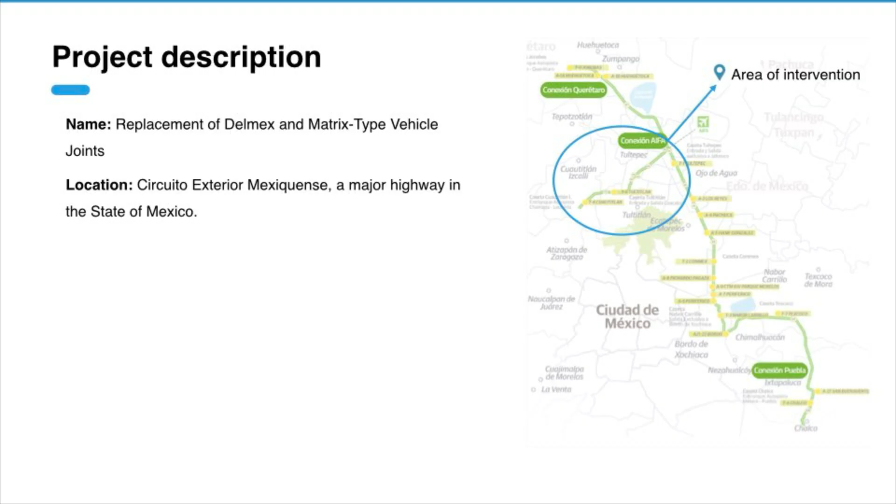The scope consists of repair works for Delmex metallic joints and Matrix asphaltic joints, covering 237.64 meters and 301.65 meters respectively. Given the high traffic volumes, it was critical to develop a comprehensive traffic management plan, which included installation of impact attenuators, compliance with road signage and safety regulations, and precise coordination of material deliveries and execution to meet contractual deadlines.

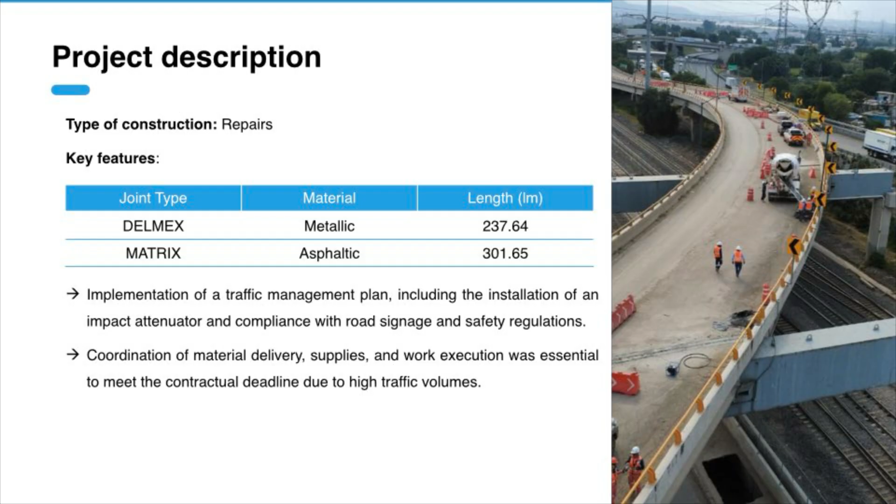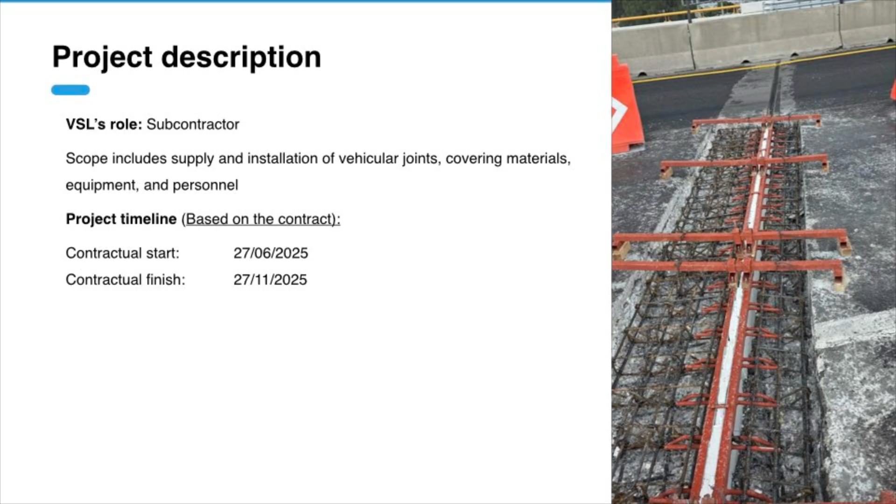VSL served as a subcontractor responsible for the supply and installation of the joints, including equipment and skilled personnel. The contractual period spanned from June 27 to November 27, 2025.

Our key deliverables were installing 500 linear meters of joint within the planned timeframe, overcoming initial delays due to administrative and equipment personnel approval processes, and adjusting to a shorter execution period from 5 months down to 4, strategically addressing mobilization, heavy traffic, and demolition challenges.

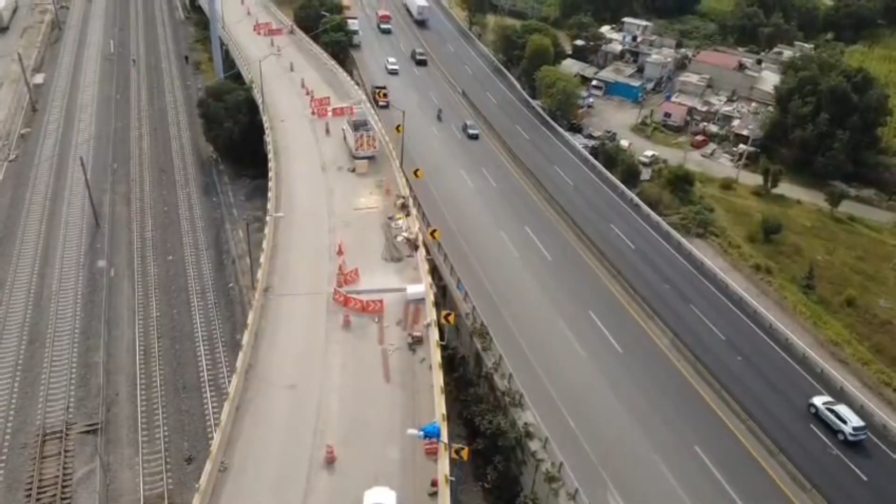The Be More approach focused on project recovery and time management, executing the works within just 4 months through strategic resource allocation and efficient workflows, worksite optimization, selecting the most efficient demolition and energy supply equipment, prioritizing both productivity and environmental impact, and financial recovery, improving the initial project margin from minus 10.32% to minus 5% through better cost control.

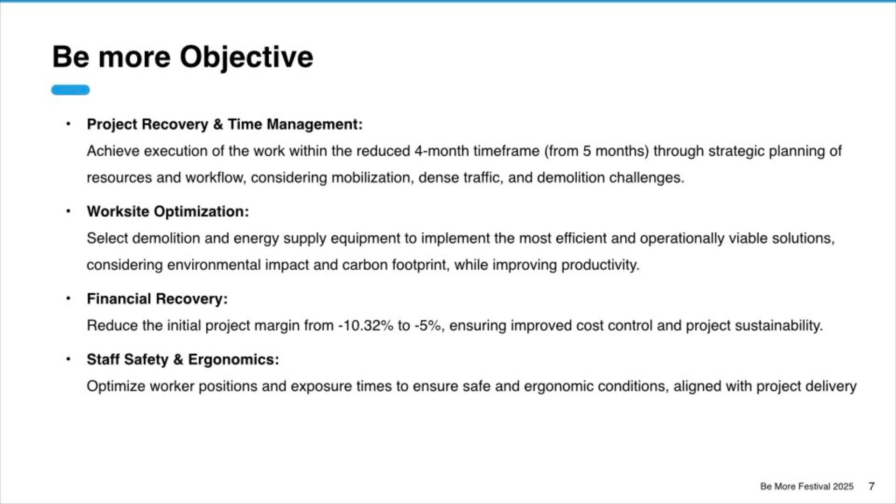Staff safety and ergonomics: optimizing worker conditions and reducing exposure times to ensure safety and ergonomics align with project delivery.

Number 2. Current progress.

As of October 20, 2025, we have reached 38% physical progress. Over 200 meters of Delmex joint have been installed, and we have just started working on matrix-type joints.

Delmex joint: it is a metallic component featuring a central opening onto which a neoprene insert is mounted to accommodate movement between fixed points, providing adequate clearance for thermal contraction and expansion. The assembly is anchored and secured with lateral bolts, supplemented by reinforcing steel, and subsequently encased in concrete in accordance with design specifications.

Matrix joint: it is a bituminous conglomerate that provides a hermetic seal and flexibility for expansion joints. Watertight sealing protects the bridge from water infiltration and contaminants. Flexibility allows for annual movement of up to 25 millimeters without cracking. Durability: resistant to traffic loads and adverse weather conditions.

Quick installation: heated and applied directly without the need for compaction or special tools.

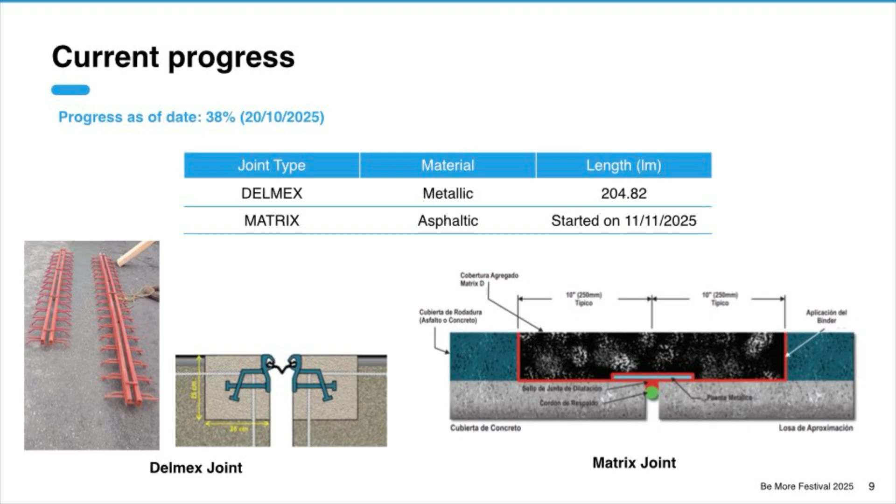Our schedule covers several sections and joint types, and we adapt as we face unforeseen challenges. Although the actual start date was August 28, our goal remained to finish by November 27, thanks to the reorganization of resources and work teams.

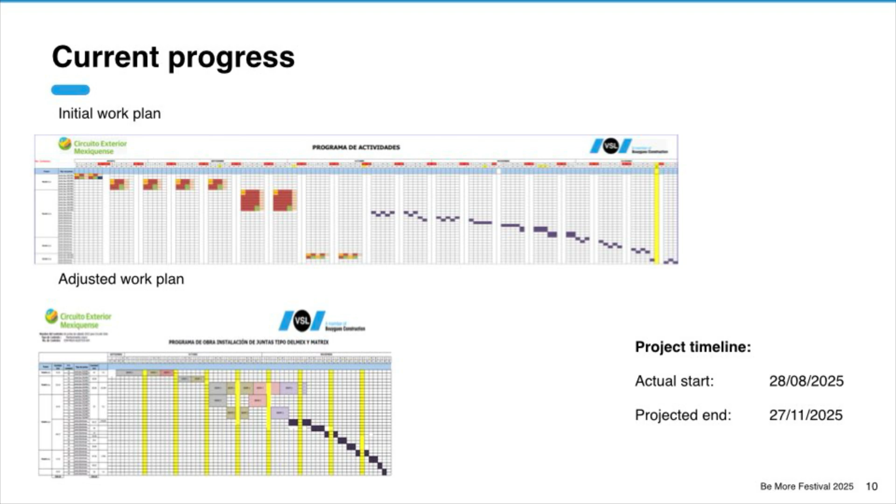Number 3. Lean implementation.

Throughout execution, we encountered several challenges: task alignment with the client's strict timeframe, personnel and supply mobilization hindered by heavy traffic, weather-related delays especially due to rain, and limited experience among operational workers.

These issues impacted productivity and led to additional labor costs and delays, particularly for concrete supply and increased quantities needed.

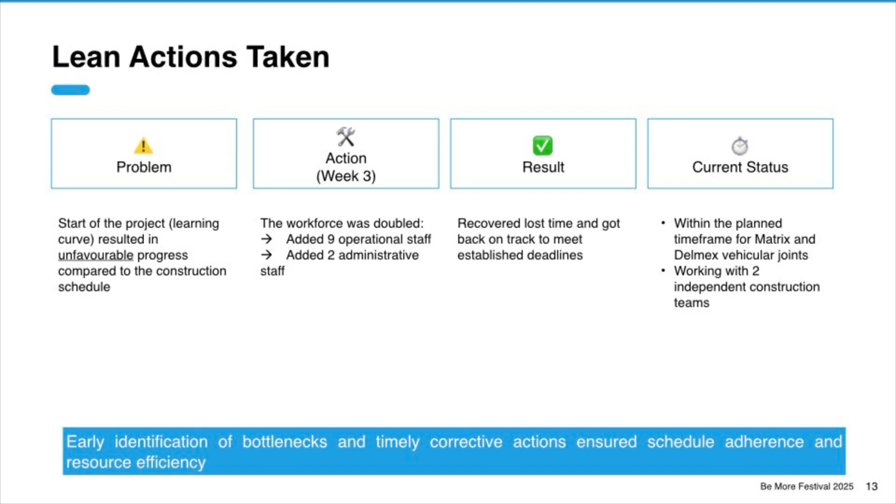To address these problems, we took swift action. First, double the workforce, adding more operators and administrative staff. Second, deploy two independent construction teams. Third, early identification of bottlenecks and rapid corrective measures. These actions helped us recover lost time and keep both Delmex and Matrix joints on track.

Through the Obeya method, we identify critical delays, particularly in concrete demolition. We estimate the necessary man hours and adjust staffing levels, bringing the project back on schedule.

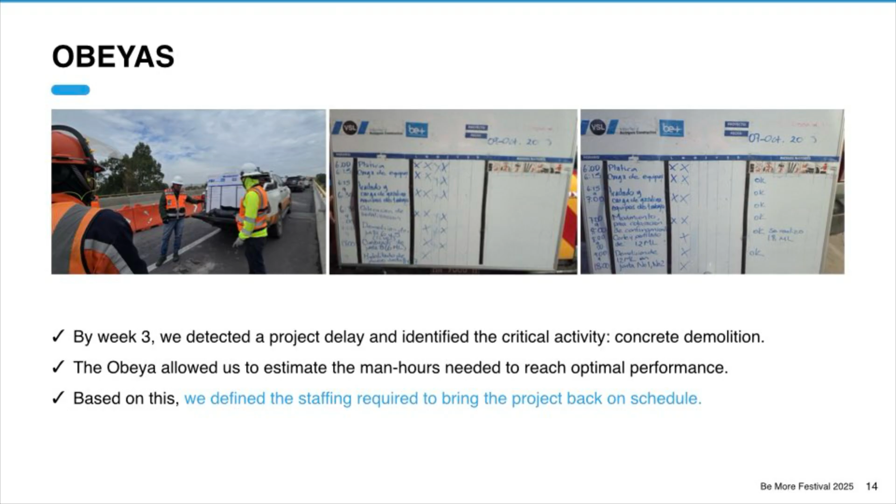We compare pneumatic and electric demolition hammers to determine the most suitable for our needs. Pneumatic hammers: higher fuel consumption, heavy, require more frequent maintenance, and generate more noise. Electric hammers: lower energy consumption, improved ergonomics, easier maintenance, and a 25.6% boost on effective man hours. Ultimately, the DeWalt electric hammer was selected for its superior efficiency, ergonomics, and lower environmental impact.

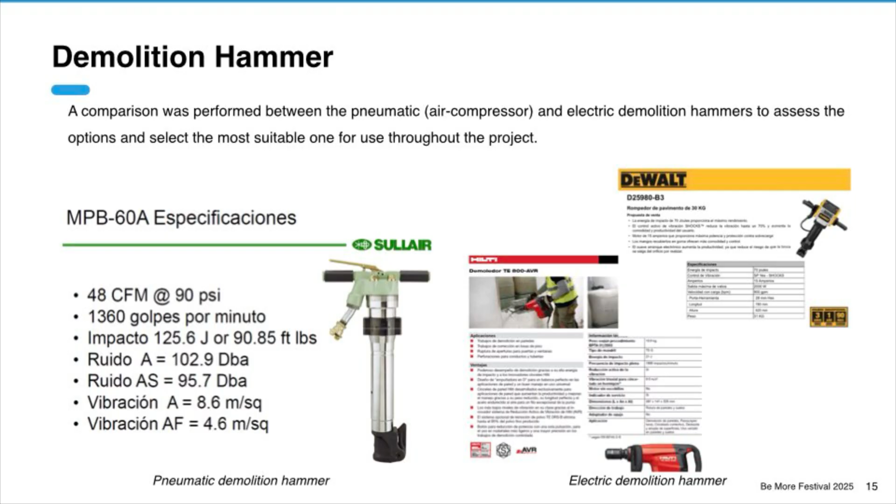First, we perform a comprehensive comparison of the equipment options for demolition works. Pneumatic equipment, which requires an air compressor, consumes 37% more fuel, making it significantly less energy efficient. In contrast, electric equipment consumes less energy, which directly reduces both our operational cost and the overall environmental impact of the project.

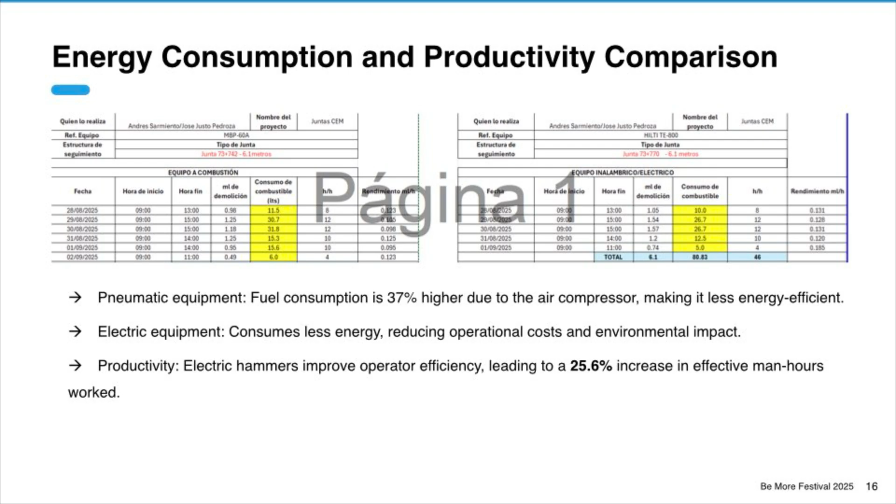From a productivity standpoint, electric hammers deliver a substantial improvement. We record a 25.6% increase on effective man hours worked, thanks to better operator efficiency.

On the other hand, electric hammers are lighter, offering much better ergonomics for our workers. They require only periodic maintenance, making upkeep simpler, while hammer bits may wear rapidly when used on high-resistance concrete. Careful handling solves this issue. Importantly, noise exposure is much lower, making for a healthier work environment.

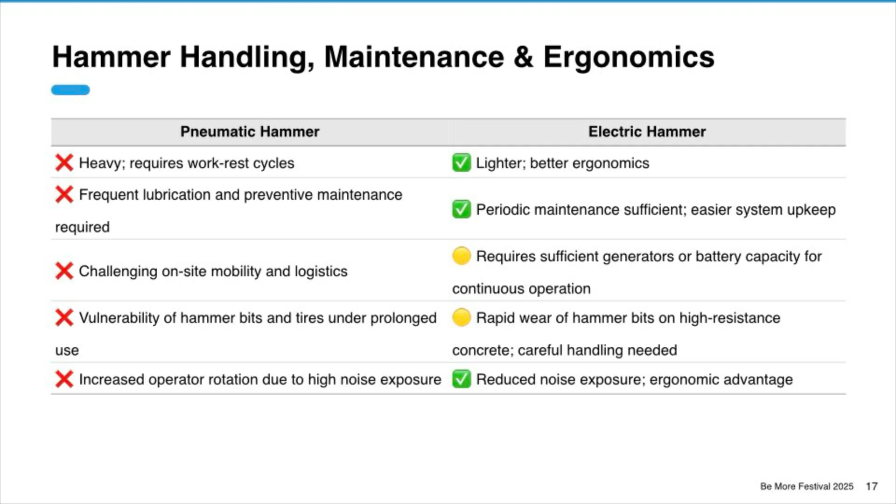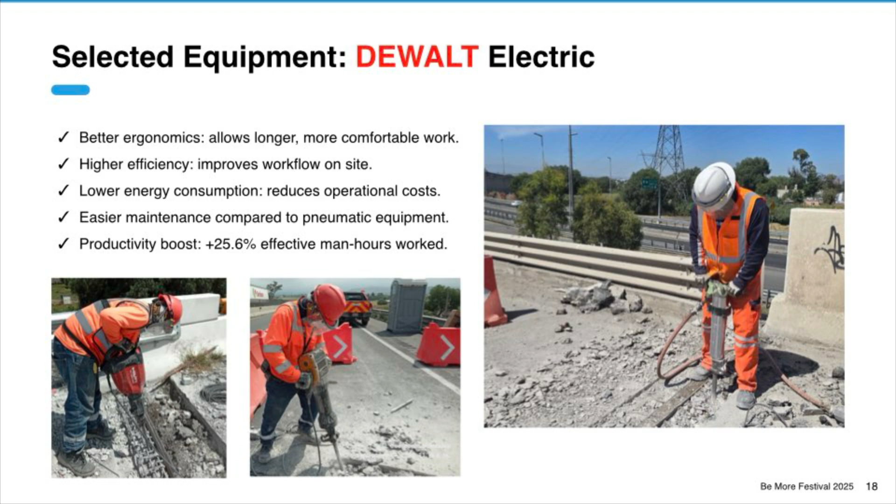Based on the results, we select the DeWalt electric demolition hammers for the project. The advantages include: first, better ergonomics allowing longer and more comfortable working hours; second, higher efficiency, which improves workflow on site; third, lower energy consumption, reducing operational cost; fourth, easier maintenance compared to pneumatic equipment. Most importantly, a productivity boost of over 25% in effective man-hours worked.

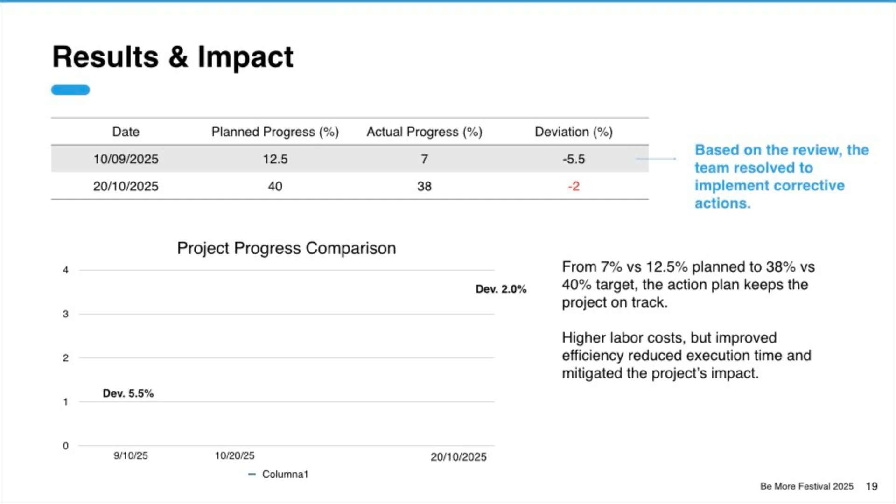Number 4. Next steps.

The implemented corrective actions keep the project on track, despite higher labor costs, improve efficiency, ultimately reduce execution time, and help mitigate the overall project impact.

In summary, we aligned with our main objectives, achieving execution within the 4-month timeframe. Execution times were reduced thanks to simultaneous work with 2 teams and qualified personnel.

Timely corrective actions and delay tracking ensure better schedule adherence. Optimization of equipment and workflow led to greater productivity and operational efficiency. Risks were minimized through ongoing staff training, ensuring safe and effective delivery.

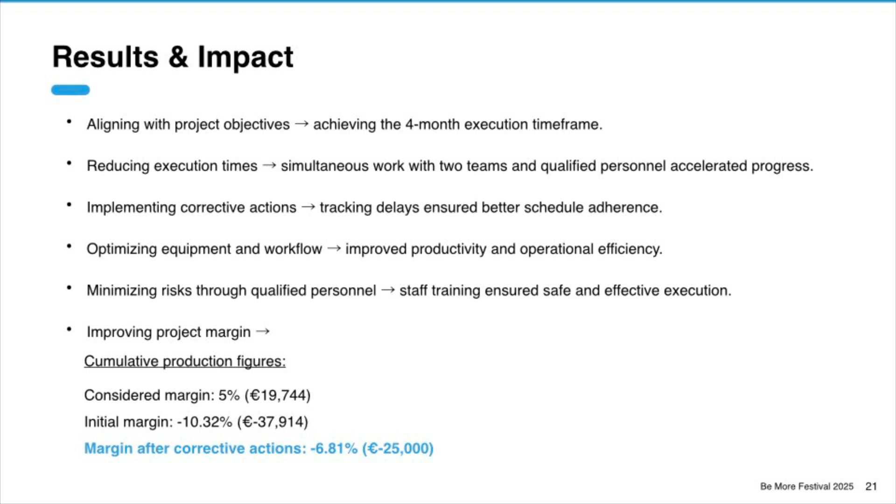Financially, we improved our project margin, moving from an initial margin of minus 10.32% to minus 6.81% after corrective actions, with an ultimate target margin of 5%.

Finally, some key lessons we will carry forward. When working with the same client in future projects, we will carefully consider workers' costs during the approval and site access authorization stage. We will also take into account learning curves and training needs when planning for equipment and activities that are not routine for our teams.

Please note, the project is still ongoing and we continue to record lessons learned as its progress continues.